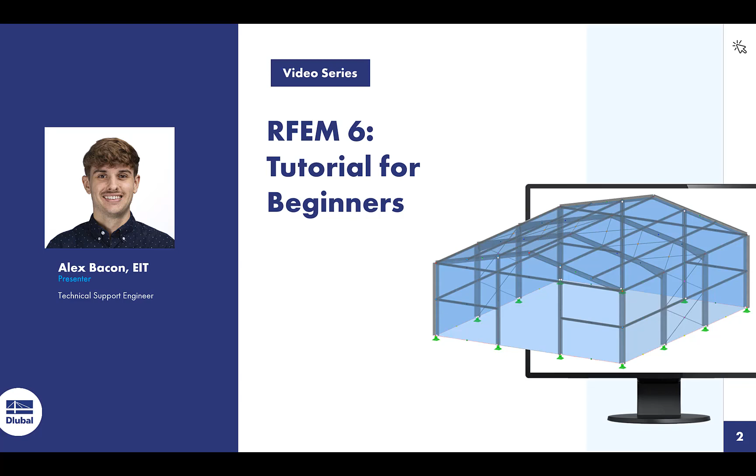First, what is RFEM 6? RFEM 6 is a powerful structural analysis software which engineers worldwide have been using for structural analysis and design for more than 30 years. With the help of RFEM, 2D and 3D structures of various materials and shapes can be created and calculated in the blink of an eye.

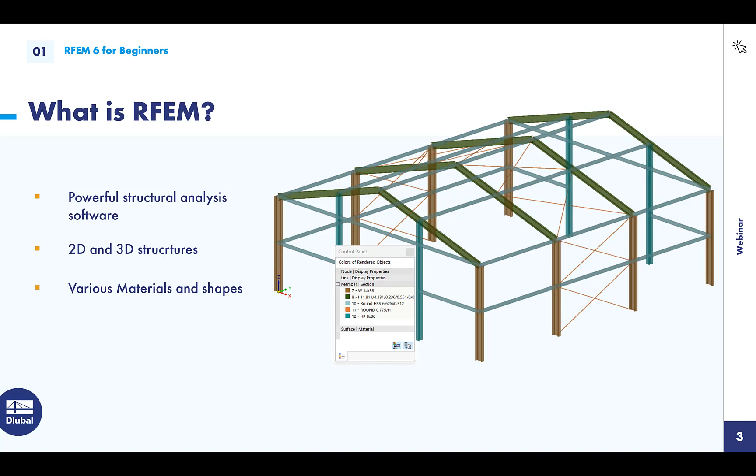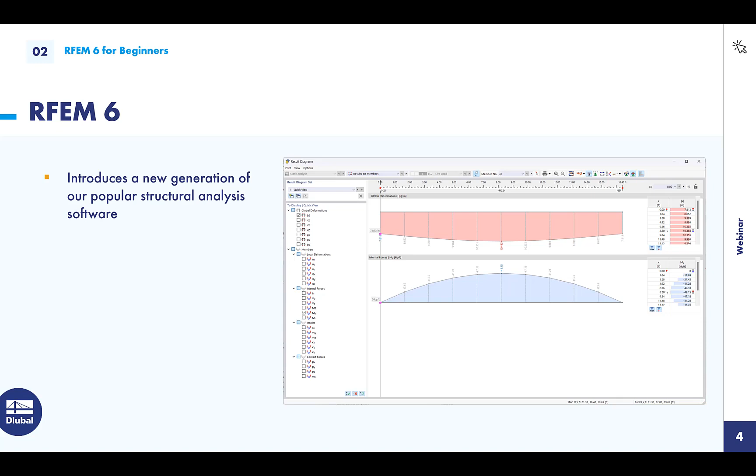RFEM 6 introduces a new generation of our popular structural analysis programs. Thus, you can expect powerful, simple, and intuitive tools for your daily tasks. Our goal is to provide the best results for our customers and stay true to the slogan, enjoy structural analysis. RFEM 6 offers a great variety of changes and improvements that make modeling faster and more enjoyable.

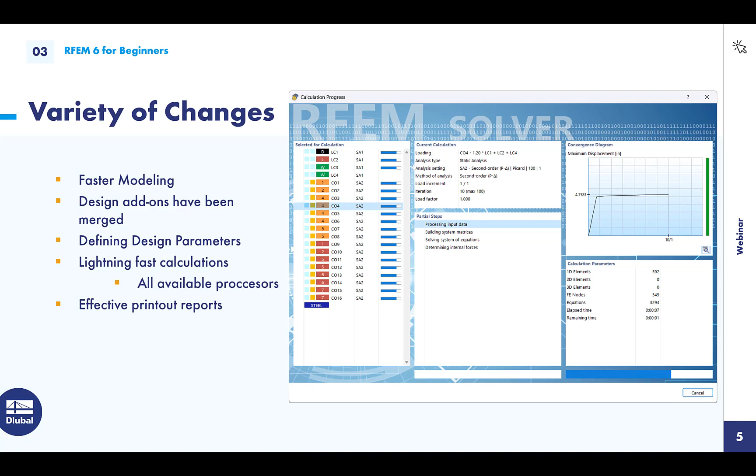For example, we have merged the design add-ons with the software. In this way, you can define certain parameters of the design during the modeling process to save time. And you can create lightning-fast calculations and effective printout reports. For this, the program uses all of the available processors that your computer has.

Our online course consists of around 20 chapters. These videos will consist of modeling a simple 3D steel hall and performing the calculation and design for the structure.

First, we will start with the installation, and then we will create a new model and go through the base data, and this will also consist of getting to know the user interface. We will dive into modeling and discovering the new functions of RFEM 6.

Afterwards, we will load the model and use our popular load generators. As soon as we're finished with loading, we will take a look at the results, perform various steel designs, and then finally the documentation of the results will be generated, and we will go through how to improve the printout report and learn its purpose.

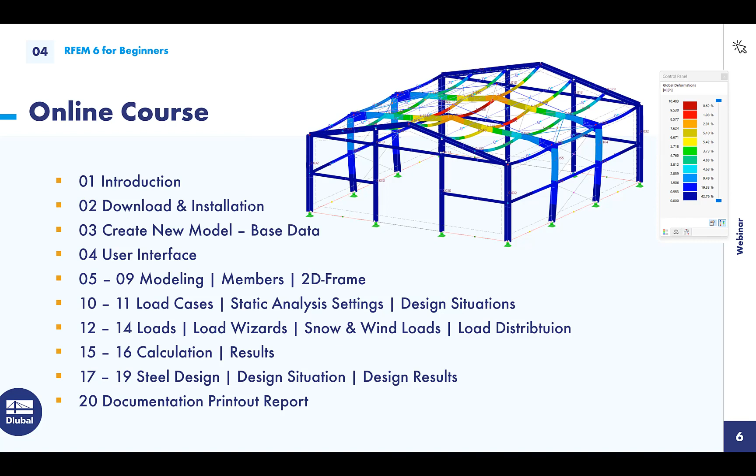To retain as much information as possible, we recommend that you model along with these video tutorials. You can also pause the videos at any time and go through the individual steps again.

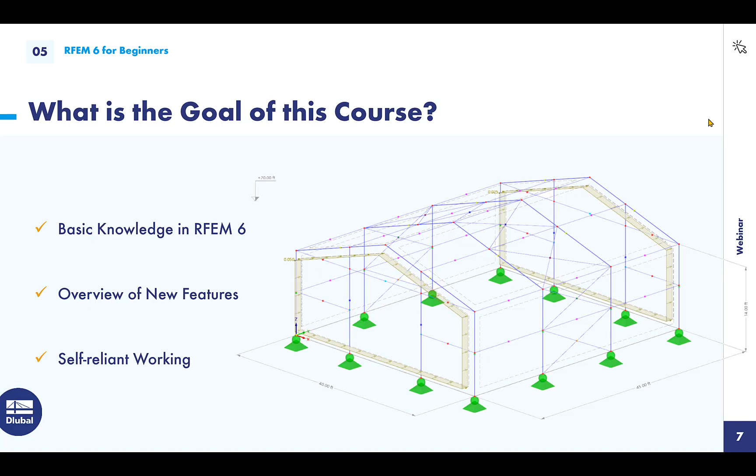What is the goal of this course? The aim of this online training is for you to gain basic knowledge in RFEM 6 and to be able to quickly find your way around the new features of this software generation, and also to be able to reliably carry out simple designs on your own.

Thus, this video series is not only suitable for beginners, but also advanced users who are experienced and also want to gain more insight into RFEM 6.